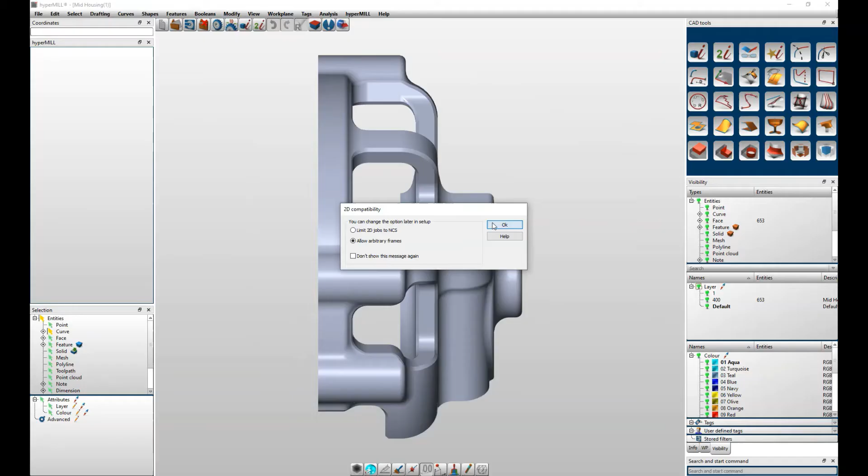So the first thing you want to do in Hypermill is, once you've imported your component, go to Hypermill Automation Center. Hypermill has software that can set it all up for you, including your clamp as well. You can see here all the different steps and options you have.

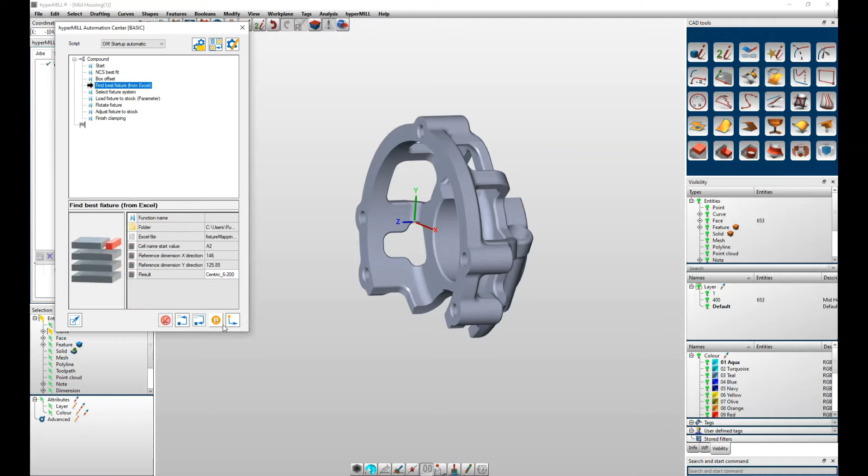If we have a look through it here, it's going to best fit the NCS for us at the start, box offset, select a fixture system, load it in, rotate it, adjust it to the stock, and then finish the clamping. You can see this here - that looks good.

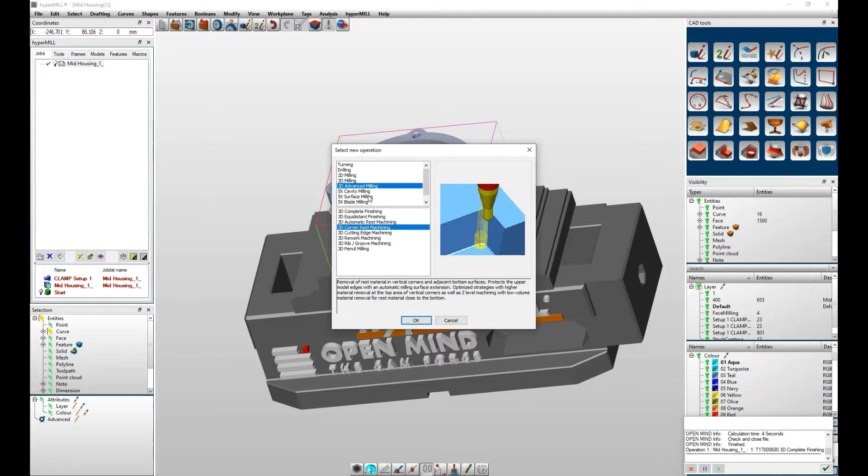Then what you want to do is create a new job list. So you want to create a new job, and the first job we're going for is 3D optimized roughing.

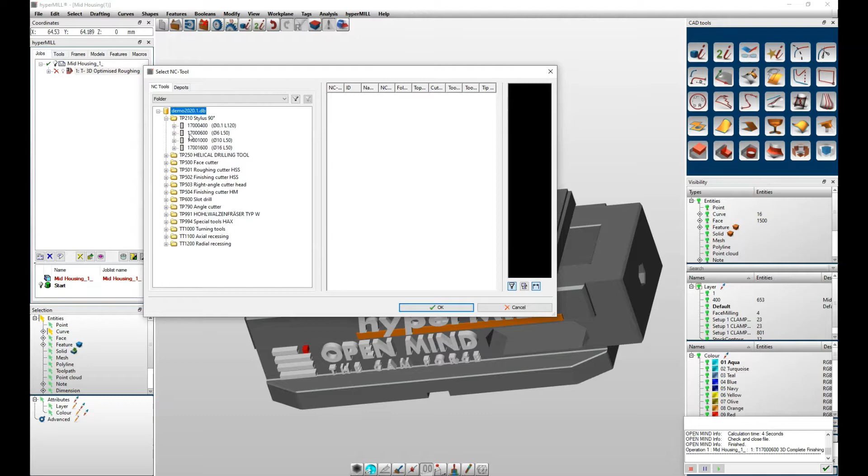You can see all the different options you have here. So then you want to select your tool. Hypermill has stock tools in its toolbox, so you have a lot of options there to choose from.

Next you want to select your strategy, so we're going to select roughing, fillet all toolpaths. You have other options here like using adaptive pockets.

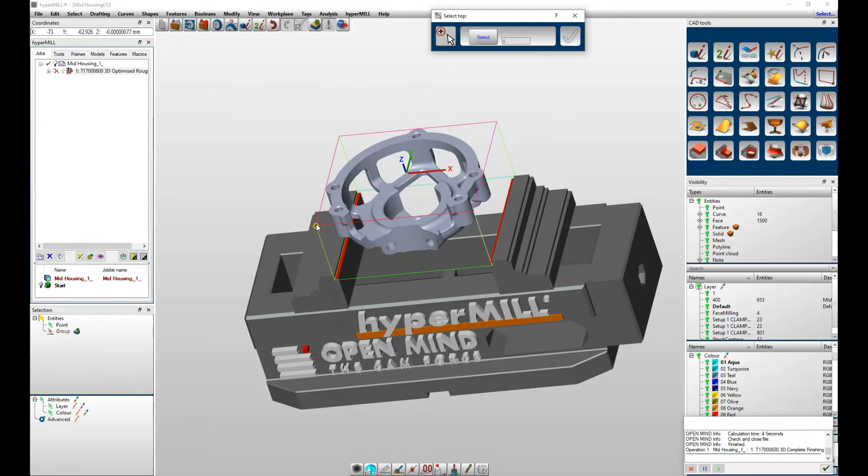Next you want to move on to your parameters, so you're selecting your heights, top and bottom. You want to specify your step overs as well, if you wish.

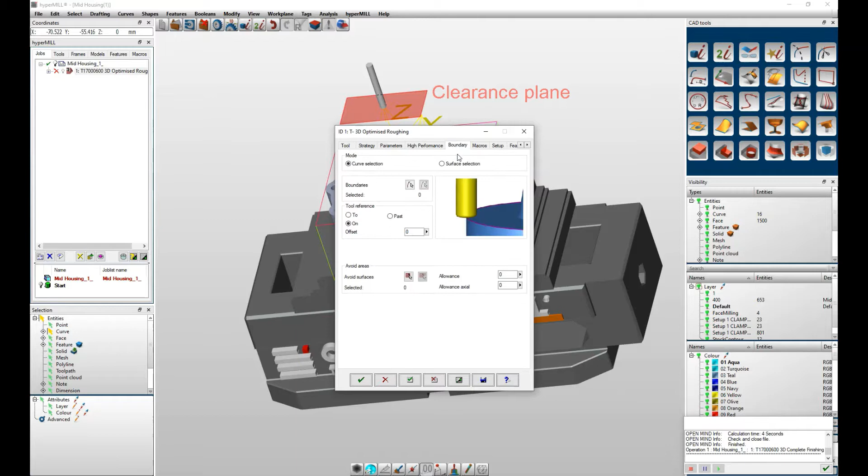Hypermill also has a high performance mode for the roughing, which you can use if you want. It does take longer to program but shorter to machine in the high performance area. So then you're just selecting through all the different options, making sure you're happy with all your settings. Once you're happy, you can hit calculate, and it'll start generating the toolpath and your resultant stock.

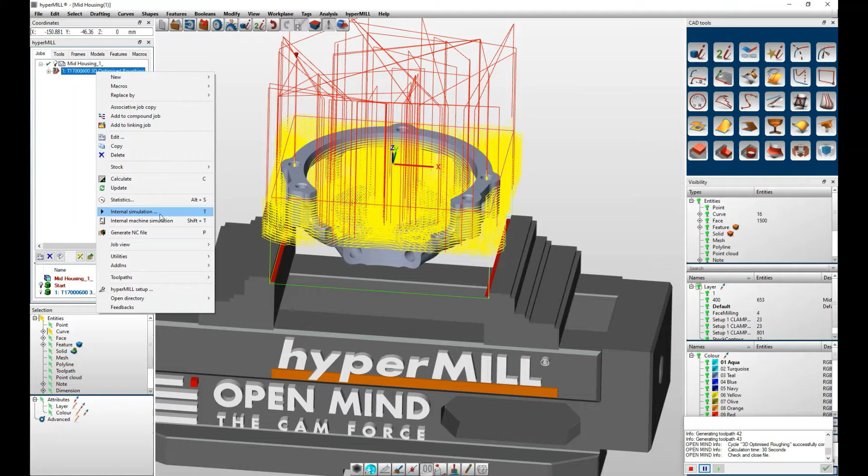Once the operation has been generated, you can right click and simulate the machine and operation internally. Hypermill opens a new window and gives you the option of changing the graphics and different things.

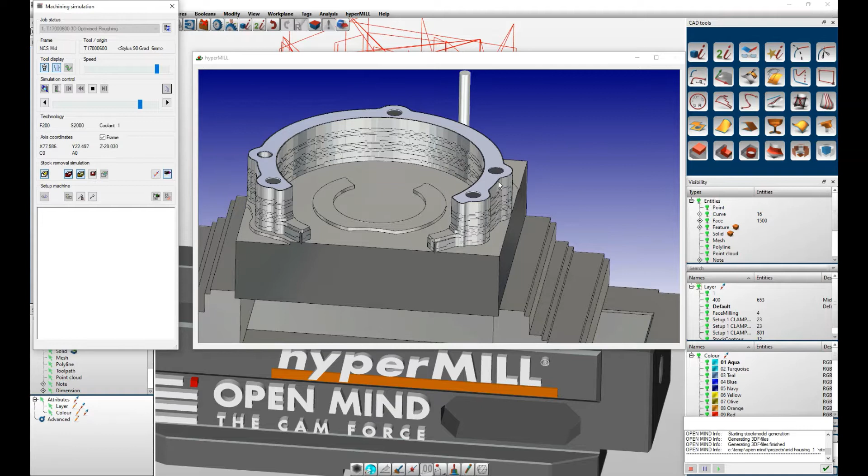That operation looks to be going well - it's machining what we're looking to be machined. So there, the machining operation has been fully simulated, and I'm happy with that result.

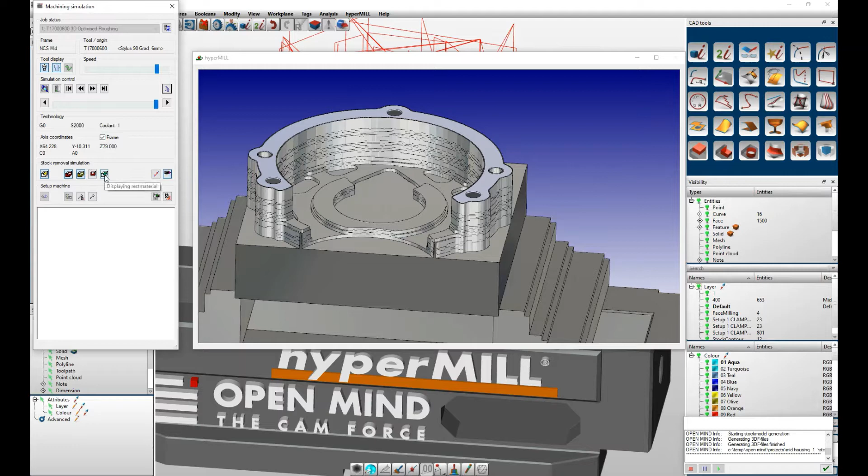You can see here different options Hypermill has for the simulation window. You can start the toolpath over. There's different graphic options here, stock removal, simulation. You can see on the left side of the menu different stocks.

If we turn this on, this is the resultant stock after the first machining operation, which is useful for seeing what you need to do next.

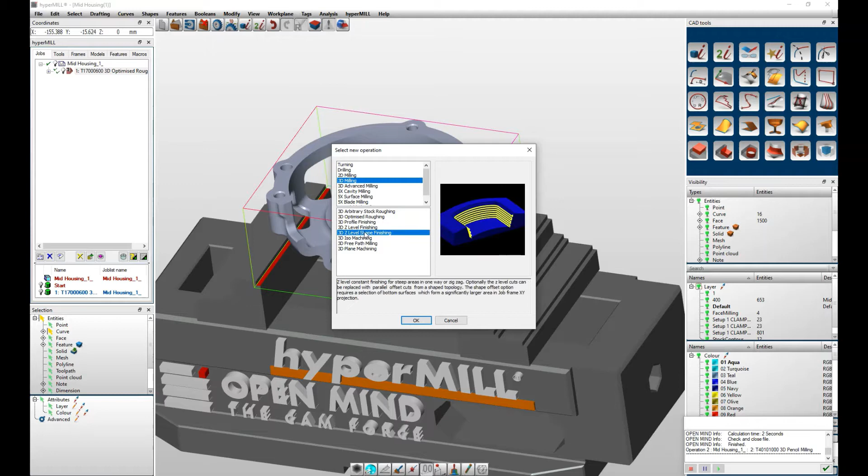So the next operation that we're going to program is a 3D complete finishing operation. We just select our tool here - we use a finishing cutter, and we're going to use an end mill.

So we're just selecting all of our settings here again. If we select zigzag and leave the radius at 2, then move on, select your heights again - that looks okay - and then specify your step downs again.

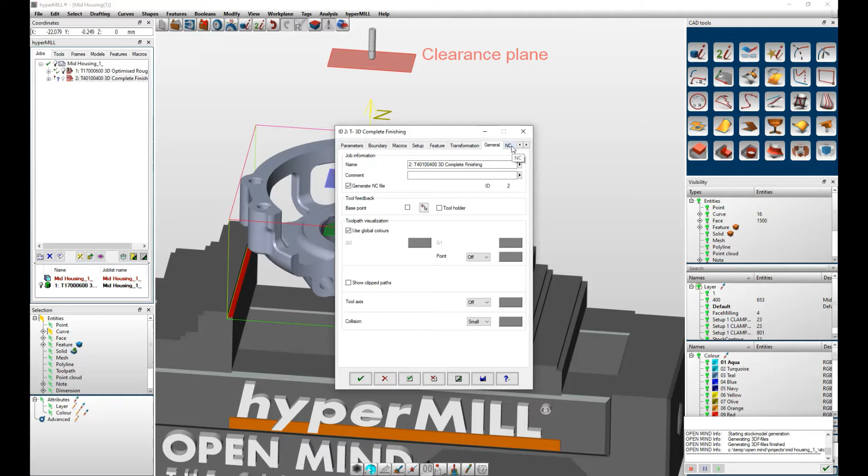This can drastically increase or decrease your machining times. So once you're happy with your settings, click OK and start generating your toolpath.

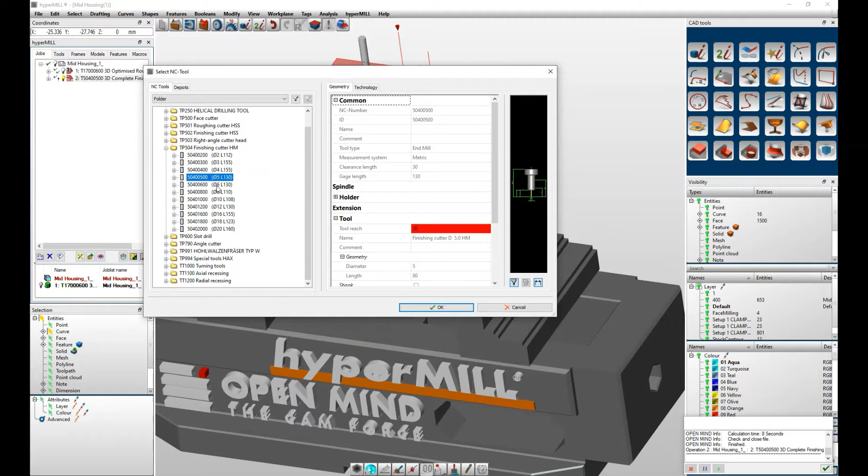So there you can see our toolpath has been generated. So if we go ahead, we could change the tool here actually to a slightly larger tool, which would decrease the machining time and increase the programming time.

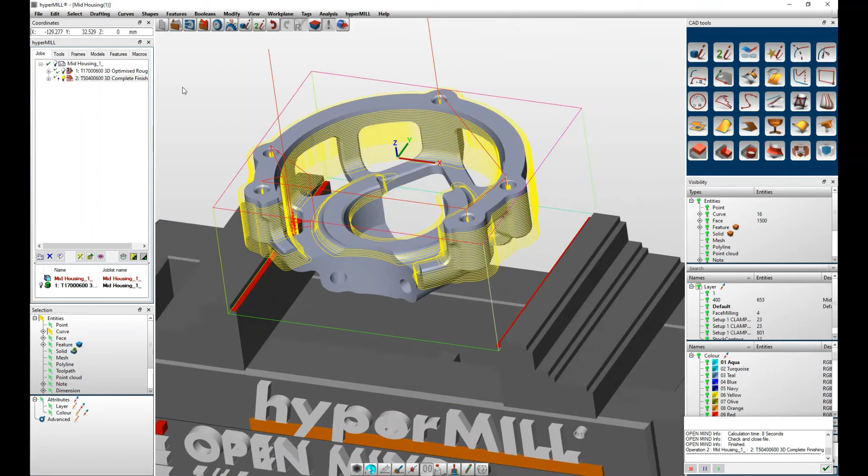So if we run this again, there you can see this time it takes slightly longer to generate the toolpath. So we can simulate the machining here in the machining window.

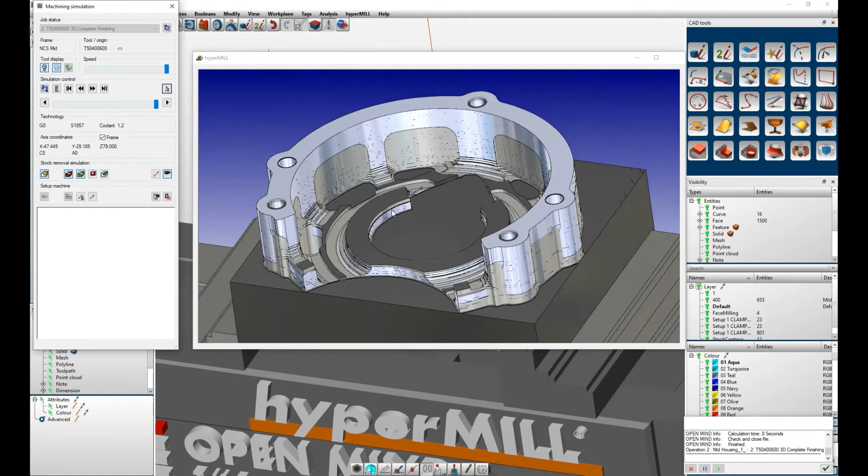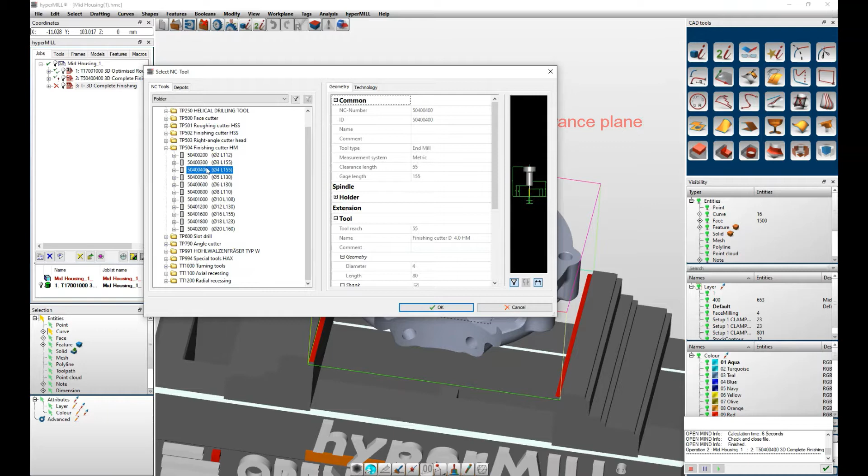And that looks good. That's exactly what we're looking for. So if we move on now, go to new job again, and we're going to use another 3D complete finishing operation. And this time we're going to use an end mill, and we'll use a slightly smaller diameter. So we'll go for a 4 mil, and then selecting all of our settings again.

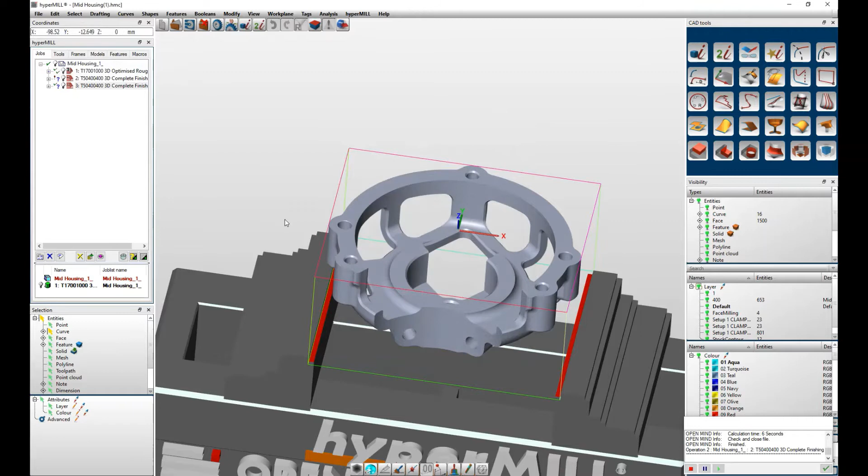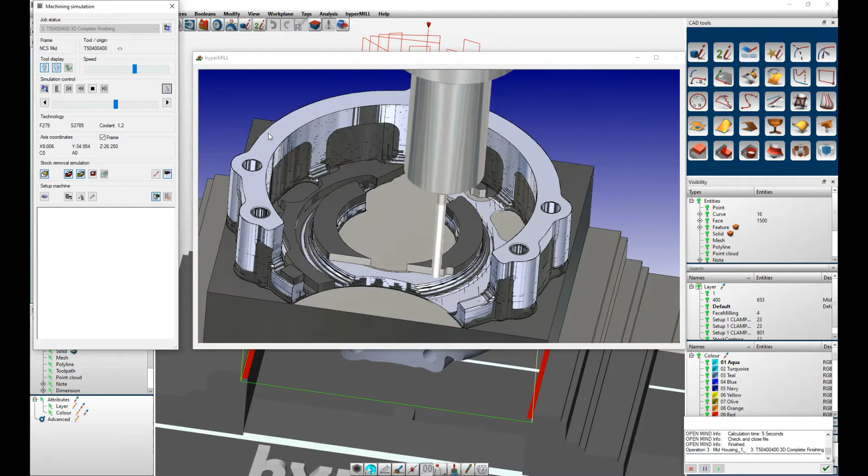We're going to machine flat areas. We're going for zigzag, and then again making sure the rest of your settings are okay. And there you can see the flat areas have been machined. So we can run the simulation here. And that looks good there. So it's machining all of the flat areas, leaving a clean surface finish. So we're happy with that.

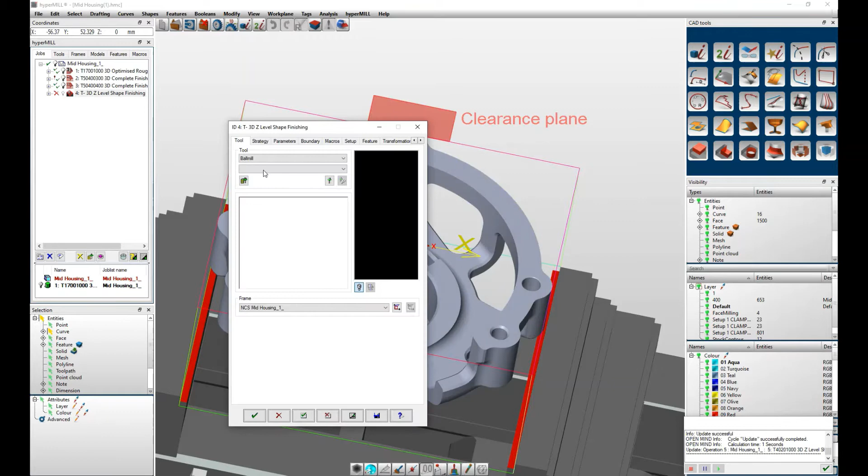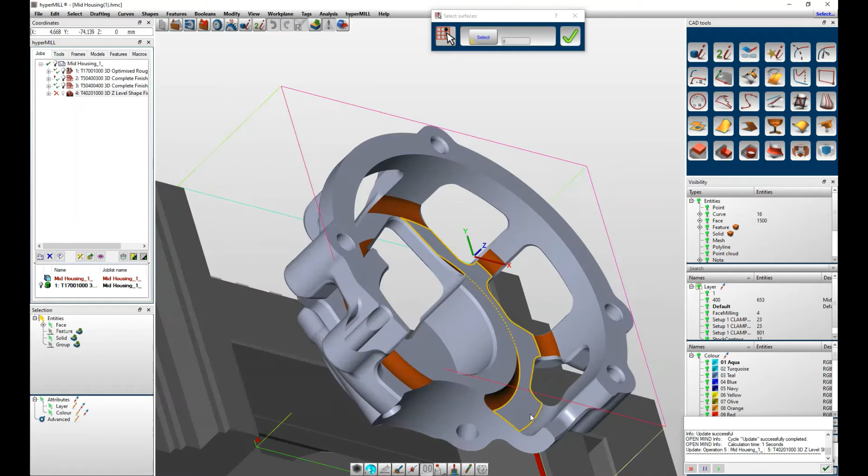Now if we move on again, another new job. This time we're going to use 3D Z level shape finishing, and you can use this for chamfers, fillets, interior walls, whatever you think it's suitable for. So selecting your heights again. If you're machining fillets with this operation, you would prefer to use a smaller step down, it gives a better surface finish. So then we're just selecting our faces here now, using the milling surfaces feature. So again, making sure everything else is okay, and then generating your toolpath.

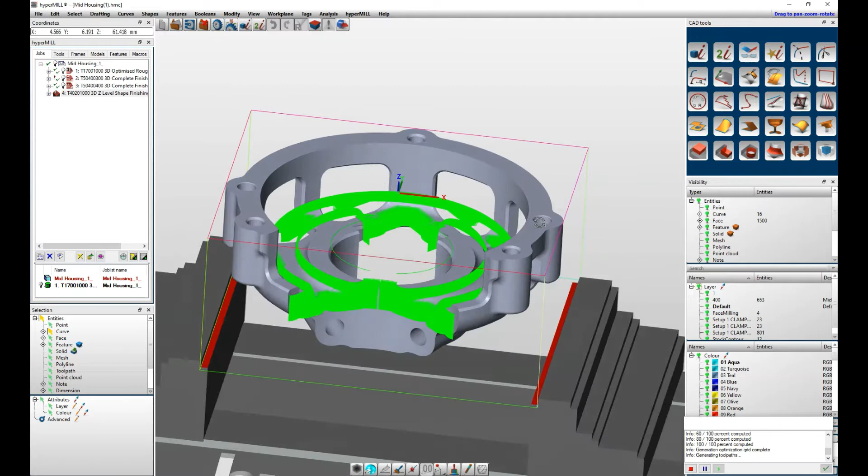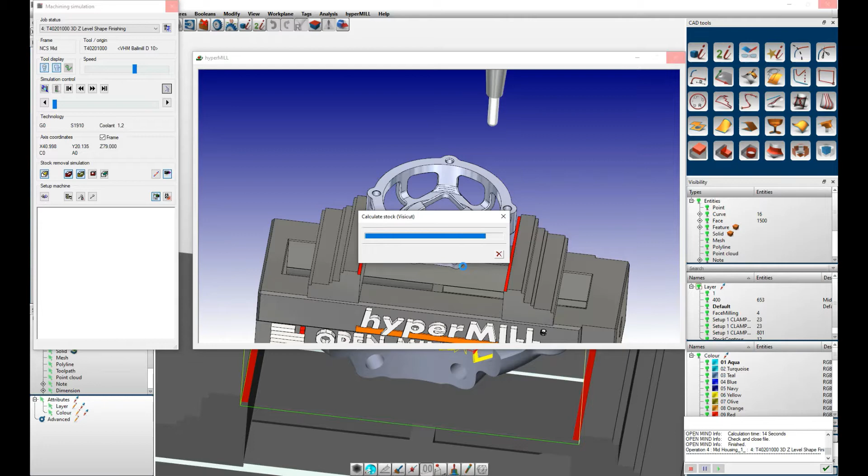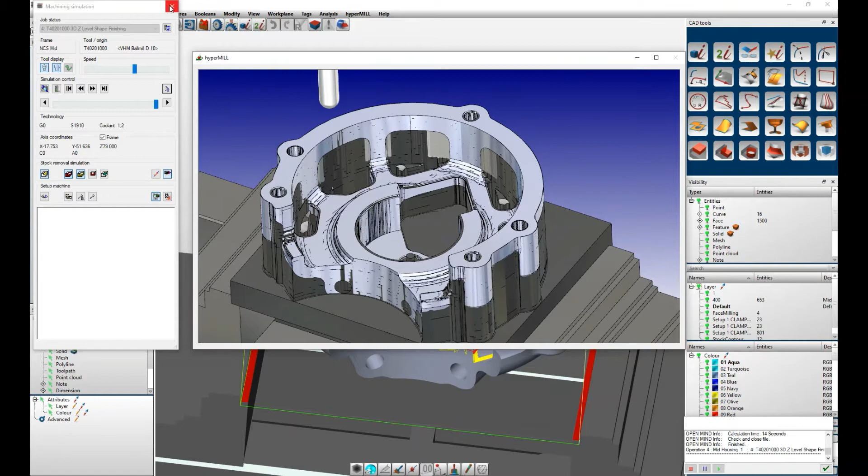So once your toolpath has been generated, you can simulate your machining through. And you're looking out for collisions here as well when you're simulating your machining. hyperMILL will give you a notification if there are collisions. That has machined the fillets on the inside of the mid housing very well, so successful machining operation.

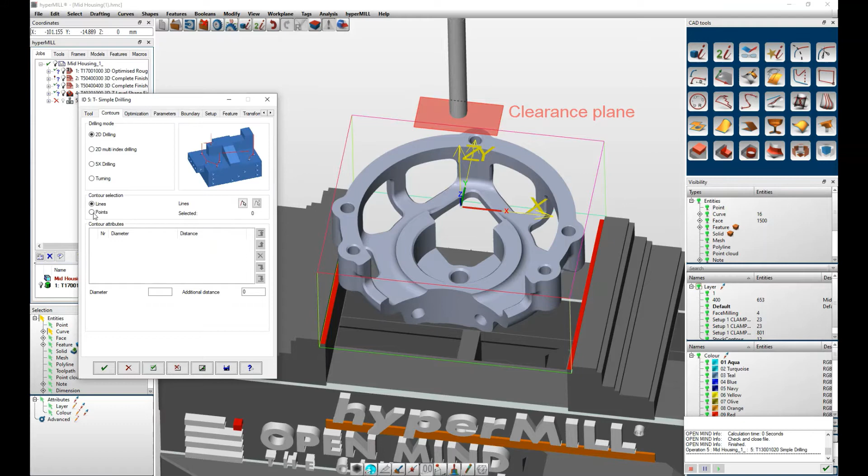So the next operation that we're going to program is a simple drilling operation, and we're just going to drill straight through the middle. So selecting the appropriate size drill bit, then selecting the center point and the midpoint, and then your heights, making sure that you're drilling the whole way through. So you need to add a little extra bit on the bottom.

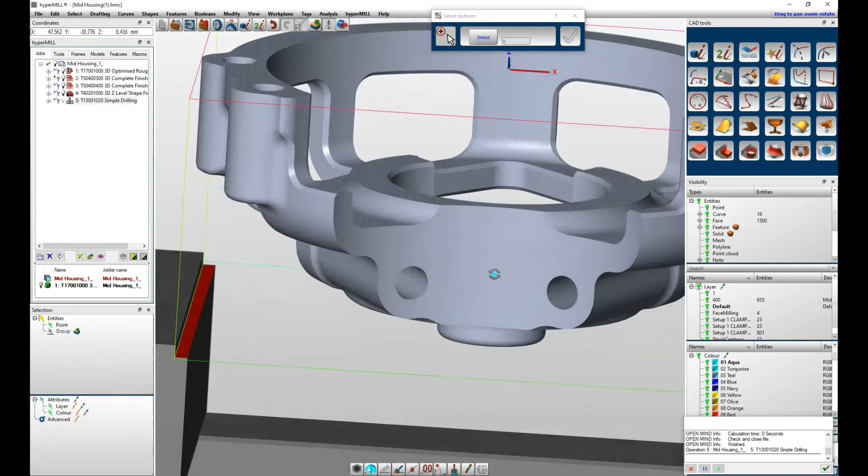So you can do it manually, or you can select it and then leave your value or change it if you wish. So then again, making sure all the rest of your settings are okay and generating your toolpath. So we'll simulate this and see what results we get. And there, that looks good. So nice clean drill straight through the middle.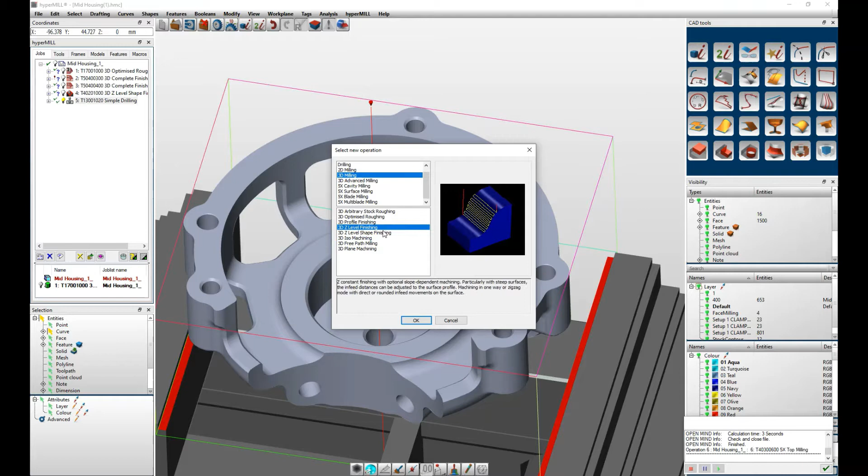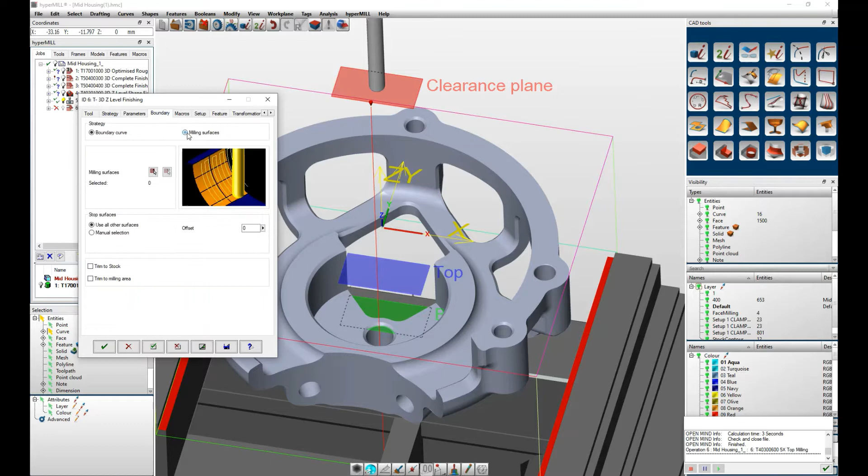So if we move on to the next machining operation, we'll select 3D Z level finishing. And for this we're going to use a bull nose end mill. We're going to use 6mm diameter, 1mm corner radius. Then we're just selecting our settings here again. Fillet interior corners, just going to specify the radius of the fillets. Again, selecting your heights. And your step down, very important again. And we're going to use the milling surfaces feature. So if we select here and then we select our faces,

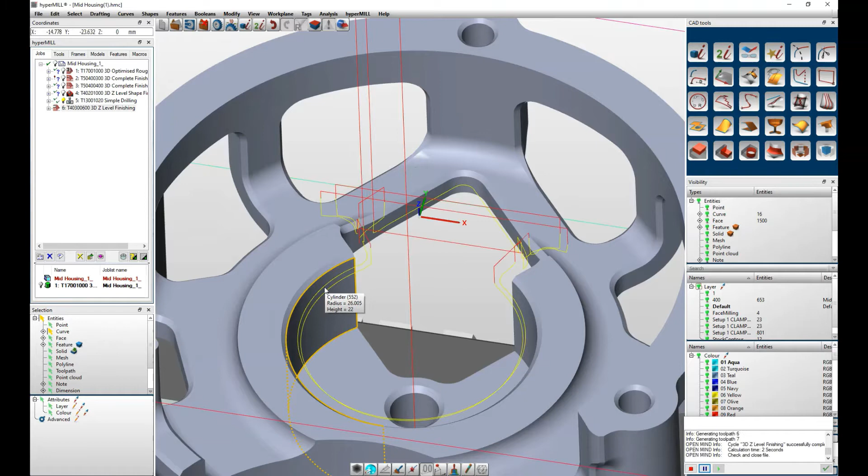and once you're happy with all the rest of your settings, go ahead and generate your toolpath. So we can simulate the operation here. So it's a fairly short machining operation. It's just machining the fillets. Sorry, the chamfers along the edge. So that looks okay.

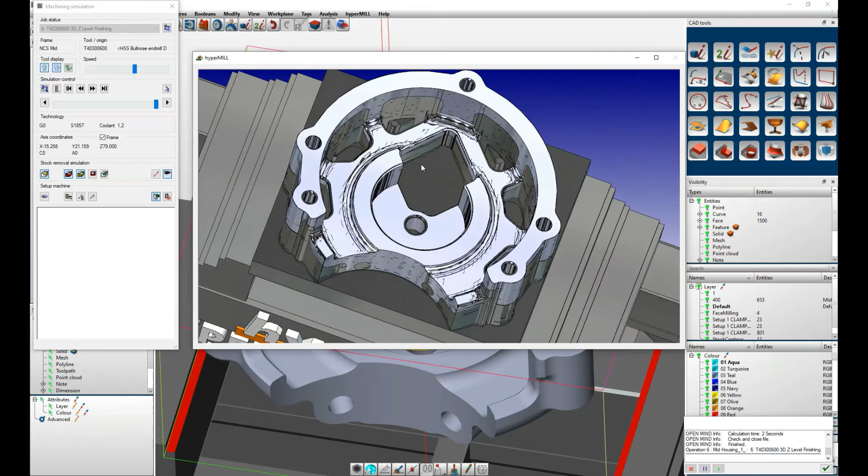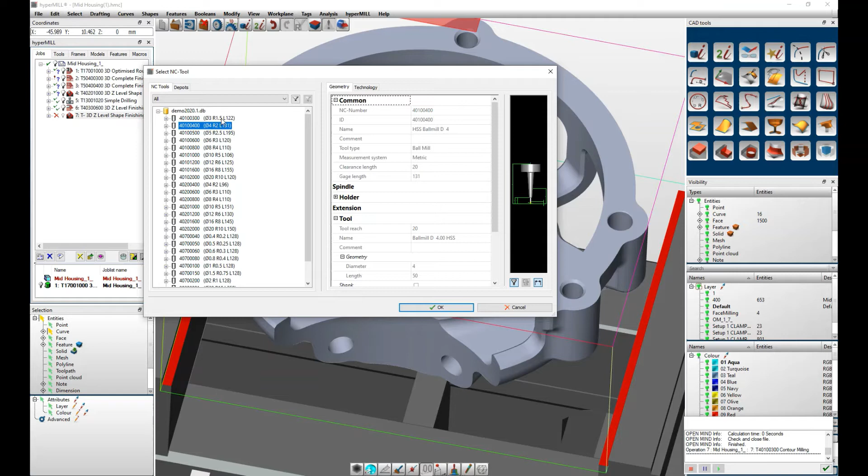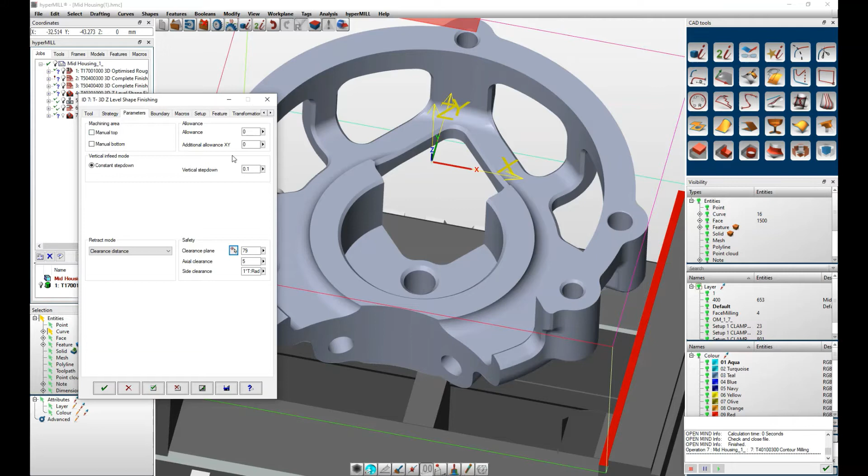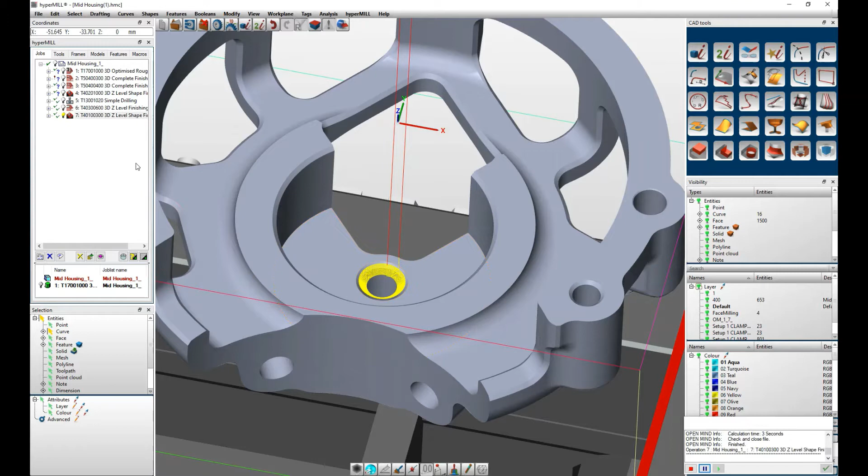So if we move on then, the next job we're going to program is 3D Z level stock finishing, or Z level shape finishing, sorry. We're going to use a ball end mill for this operation, and we're going to use a 3mm diameter tool. Again, just selecting your settings, specifying step overs and heights. So we're going to use the milling surfaces feature again, just to select this chamfer. So once you're happy, then go ahead and generate your toolpath. And you can see that looks good so far if we simulate it through.

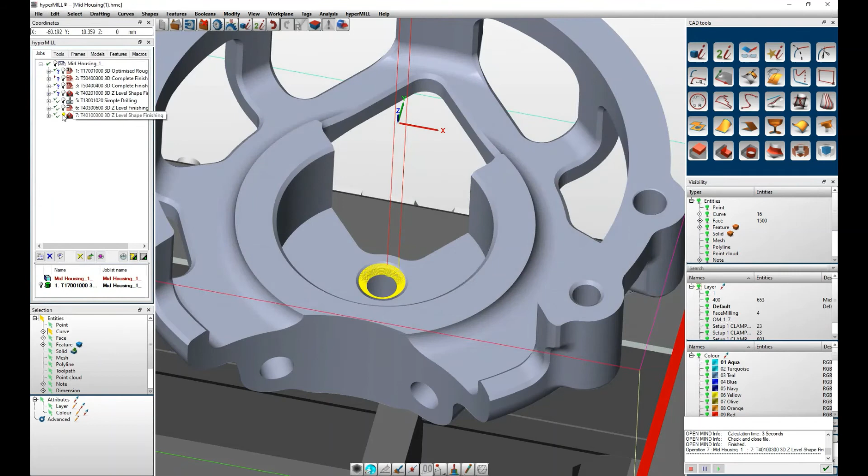Okay, so that operation is machining the correct area and it's leaving a good surface finish. So the next thing we want to do is these chamfers along the top of the drill, or these holes. We can actually edit the last machining operation and just add in the selected faces. So we can click here and this side as well, because it just adds these faces to the chamfer that was already machined. So if we rerun this operation, you can see the toolpath generated now, and that looks good. It's machined all of those chamfers.

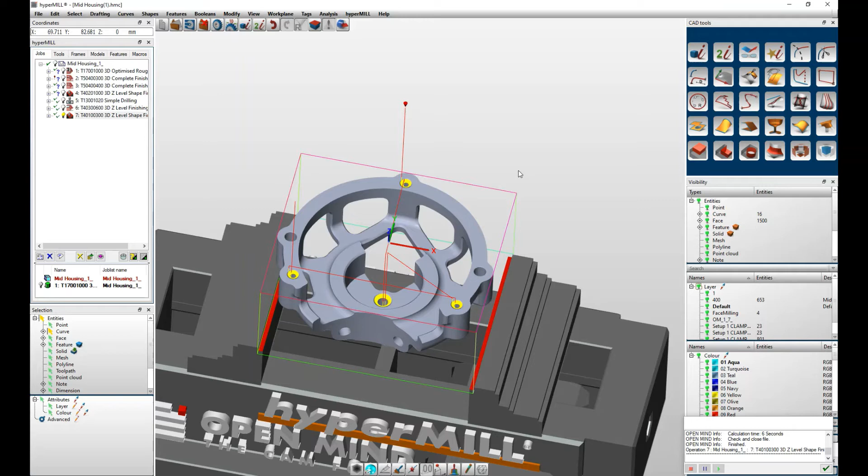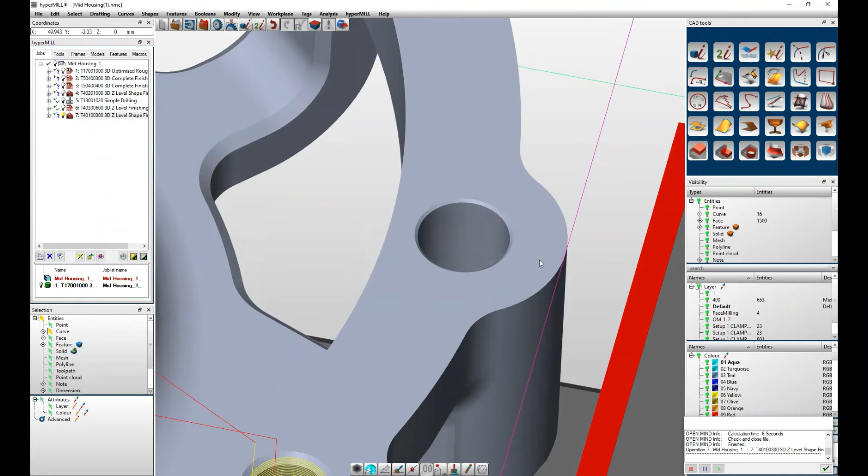So if we edit this again and we go to boundary and select faces, we can actually select these smaller chamfers also and add those in. So we can put all of these smaller chamfers on the one machining operation. So there are the toolpaths generated. And if we simulate this through now,

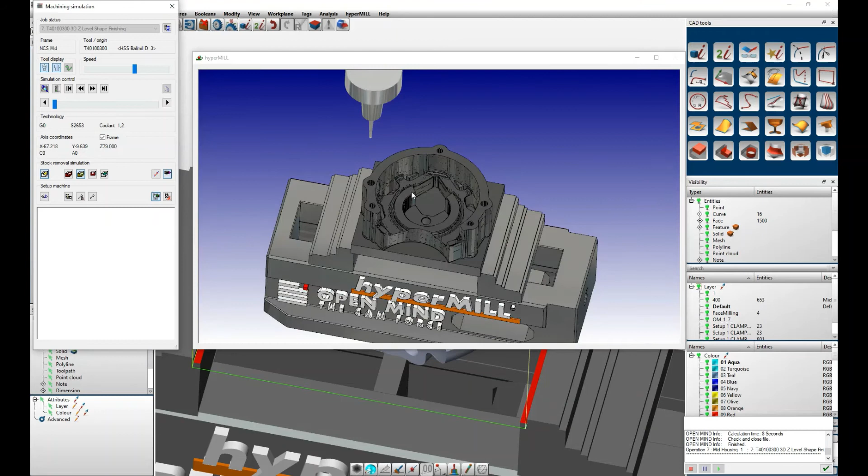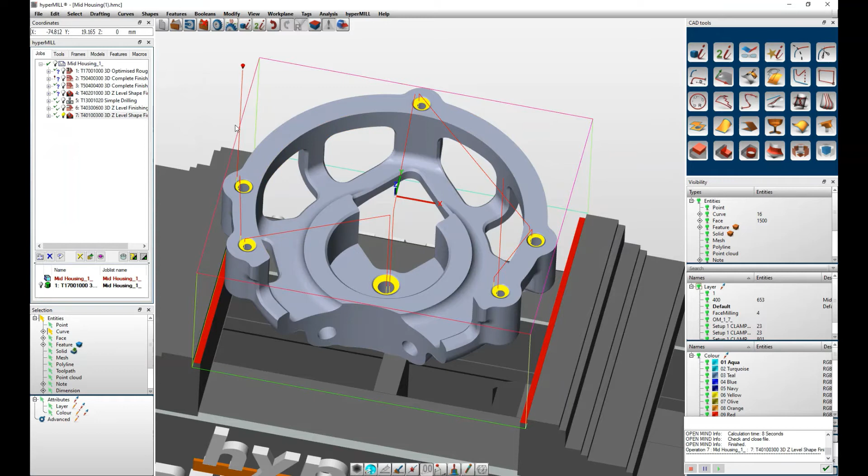okay, so there's the updated stock, and if we go ahead and play this simulation, you can see the machine giving a good surface finish on these chamfers, mainly due to the step over. Okay, so happy with that operation.

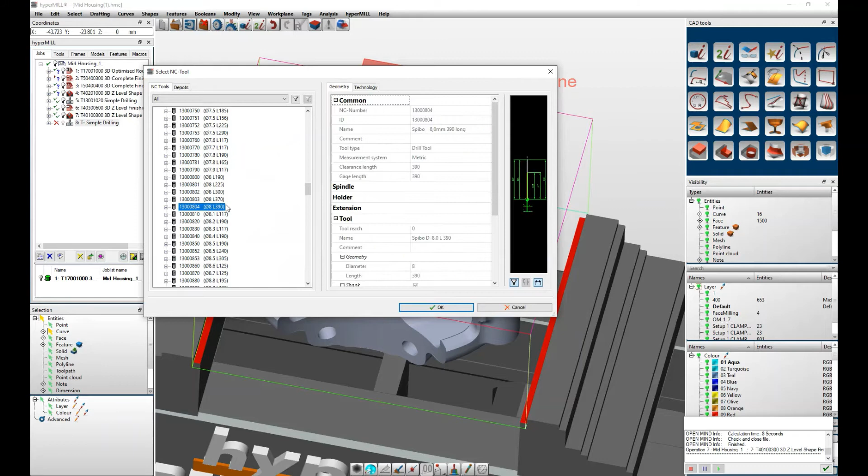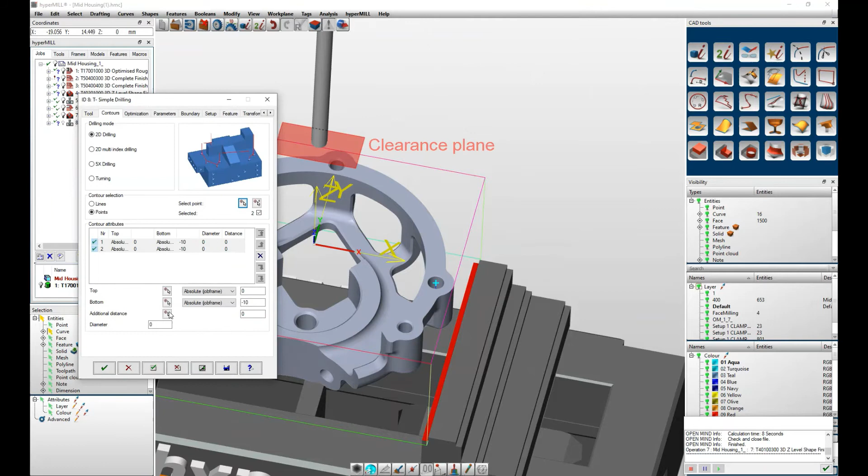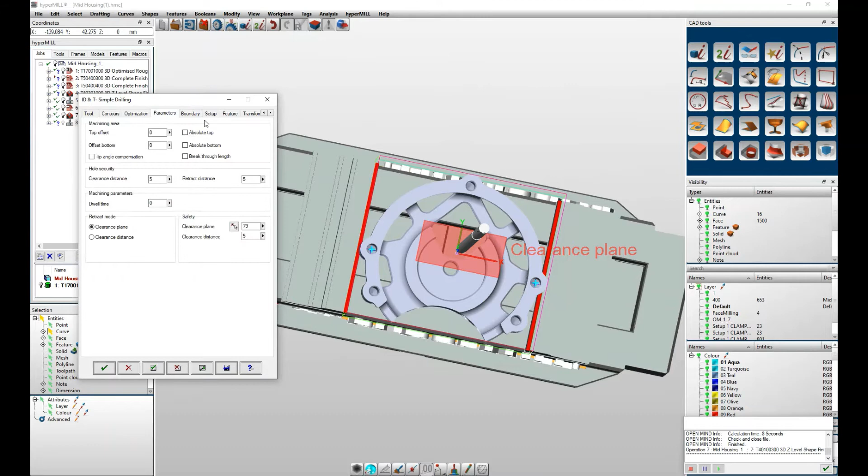Now, next what we want to do is drill these holes on the top of the mid housing. So if we go new job, and we're going to go simple drilling, and then we're just selecting the appropriate size drill bit. Again, making sure the rest of your settings are correct. So you can select the midpoint of your holes. So we'll do these two first because they're the same size. And then selecting your heights again. So once you're happy, go ahead and click calculate.

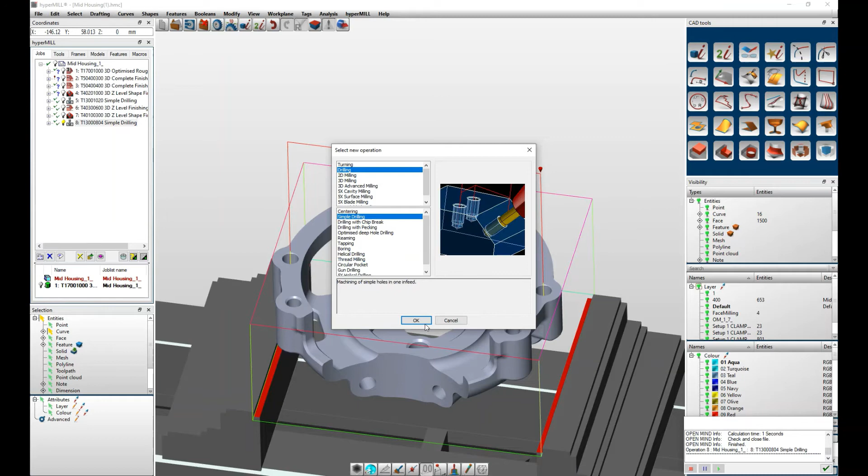Then we'll do the second operation for the other three holes. So new job again, simple drilling. And again, selecting the appropriate size drill bit for the three holes. And then making sure the rest of the settings are correct. So selecting the center of your three holes.

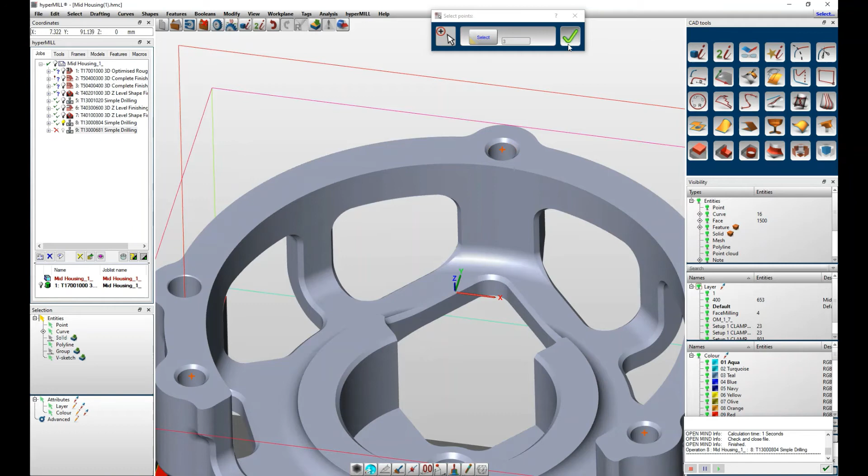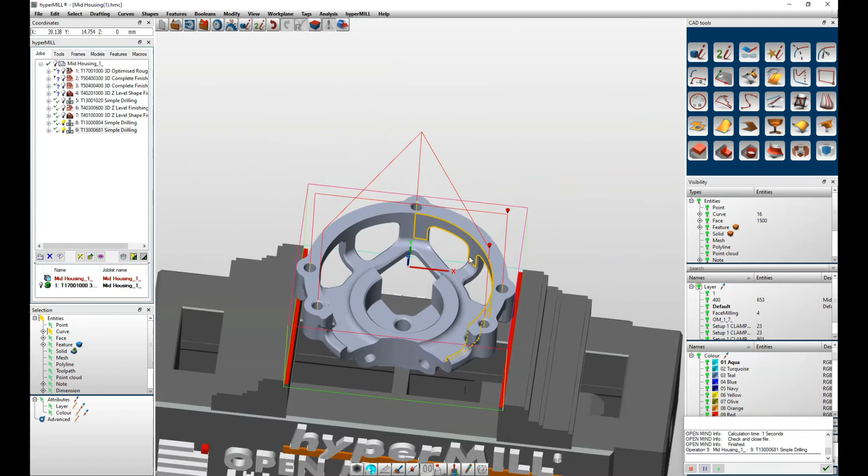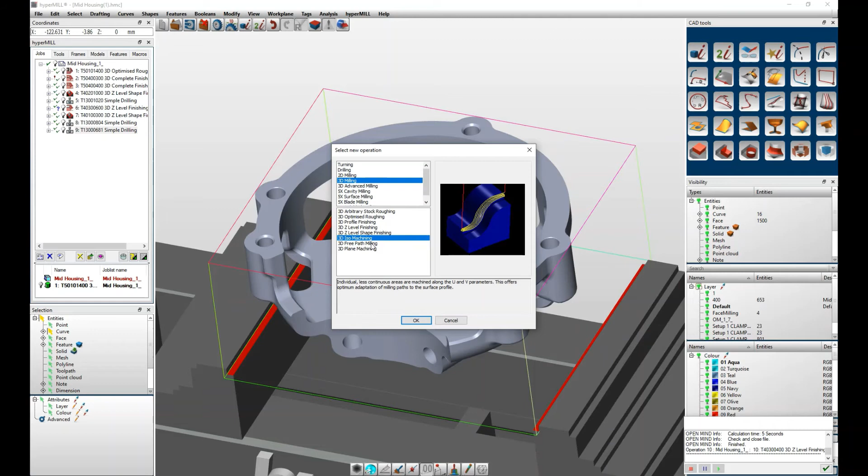So once you're happy with the rest of your settings, go ahead and generate your toolpath. You can see here that the toolpath's generated and it is drilling the three holes we selected. So if we go for a new job now and continue with the next operation, we're going to use ISO machining for this operation. We're going to be machining the chamfers on the inside of the inside pockets.

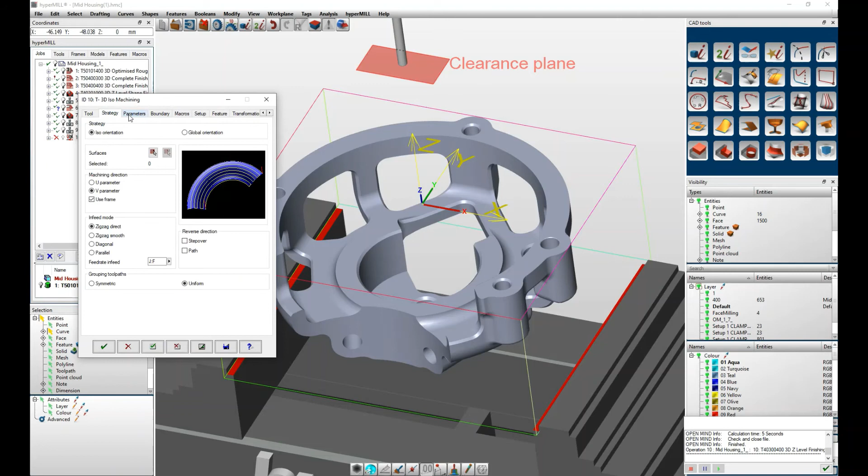So we'll use a bull nose end mill for this operation. Again, just selecting our tool here. And we're going to use the V parameter for machining direction. We're going to use zigzag direct. Again, selecting the rest of your settings, making sure everything's correct for the operation. And we're also going to use the select surfaces feature to select the faces that we want machined on the chamfers and the inside of the pockets. So if we just click these, very simple.

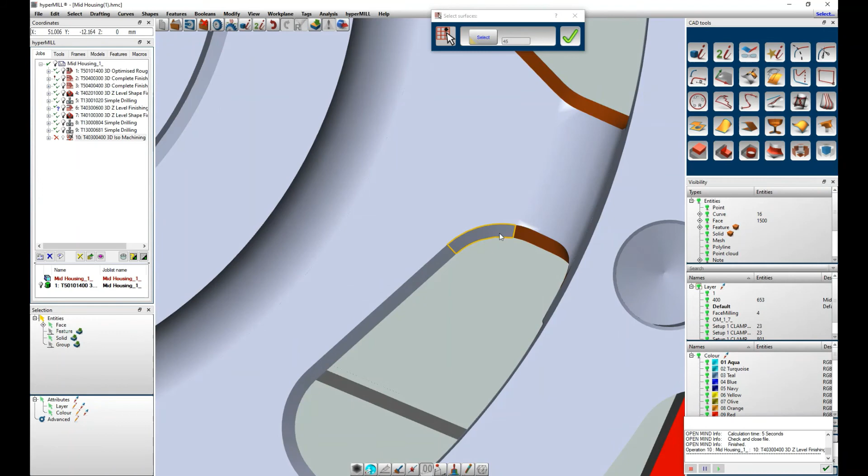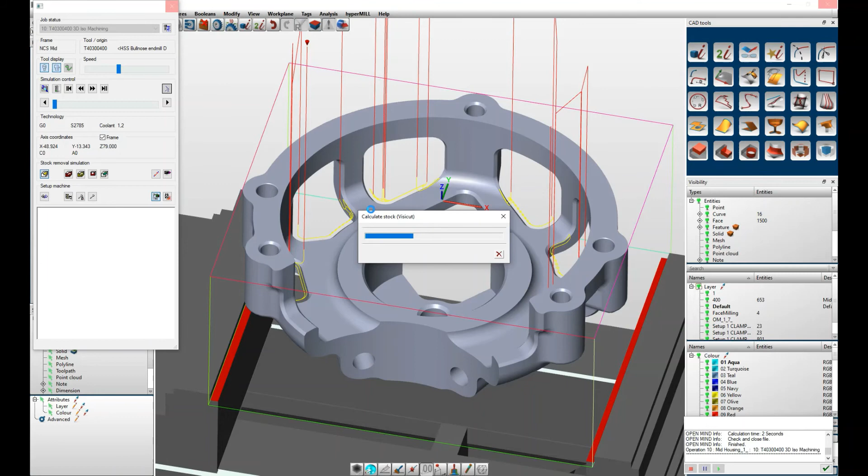So now that we've selected all of our faces, we can go ahead and calculate the toolpath. You can see here it's been generated. So if we simulate the machining, it looks good. We're machining the right areas, and the step over is ensuring a quality surface finish. So happy with that.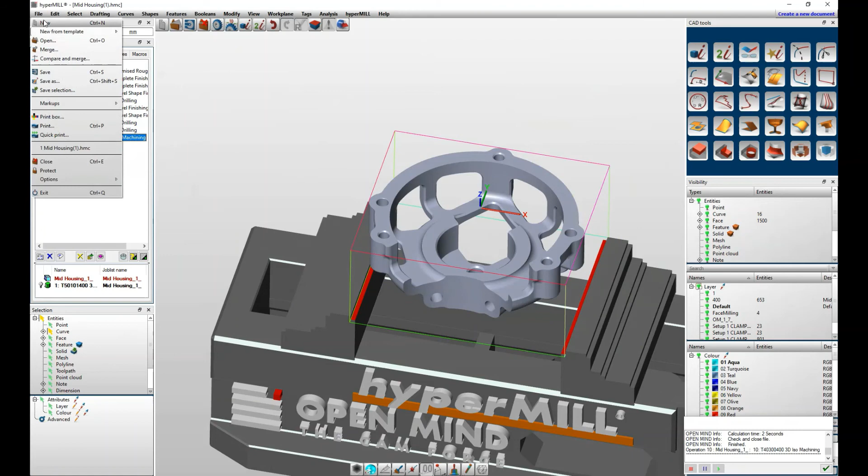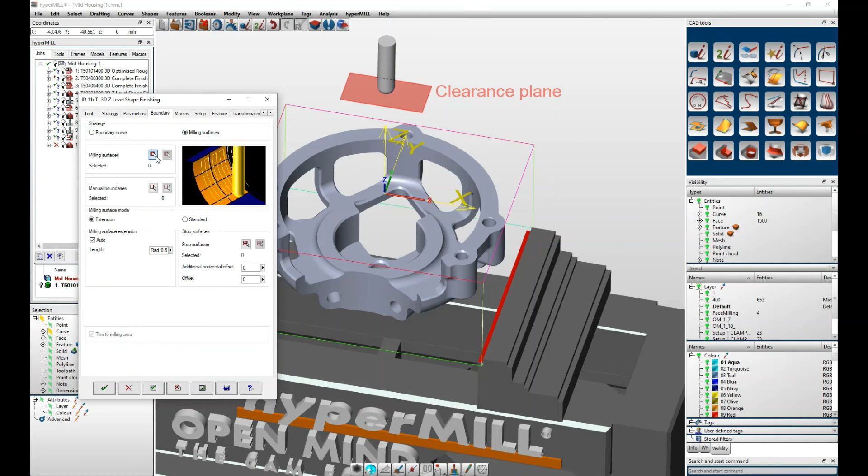And always make sure to save your work as you go, because CAD/CAM programs are more susceptible than normal programs to crashing. So if we move on then to the next operation, we're going to use another Z level shape finishing operation. So selecting the appropriate ball end tool, and then again selecting all of our settings. We're going to use this select faces again. Very handy tool, very easy to use, and we're just going to select these fillets that we want machined here, and we don't need to specify too much in the settings here, so we can go ahead and generate the toolpath.

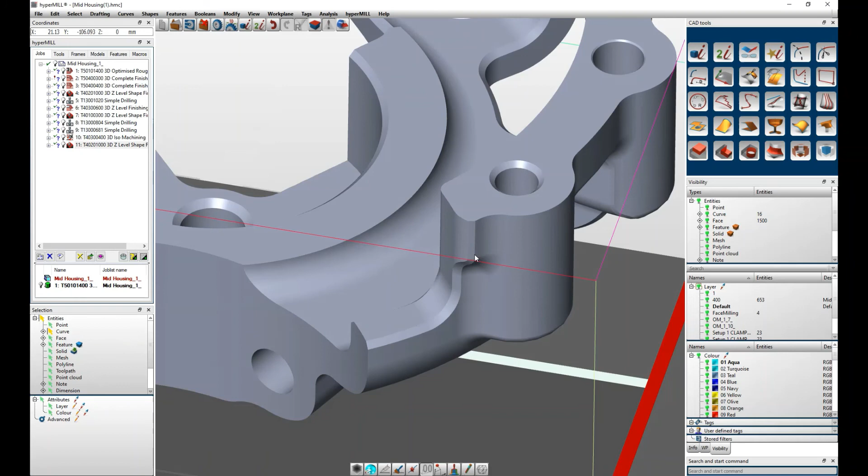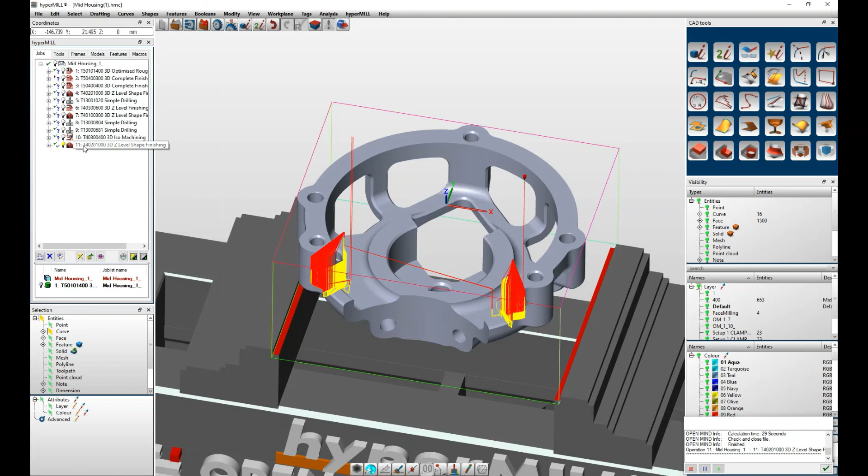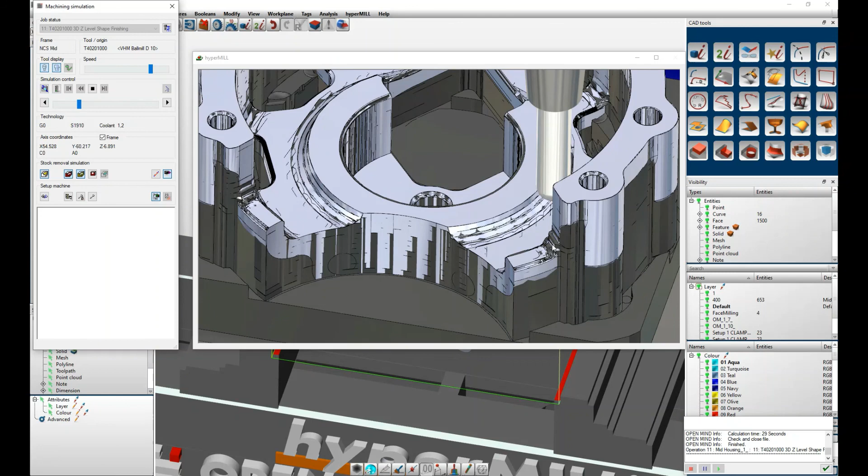So now that toolpath is being generated, you can see it's machining the right areas anyway. So if we go ahead and simulate this through, we can have a look at how it performs. Yeah, so there's no collisions there, machining the right areas. So that's it for this tutorial. This was the first part of a two-part 5-axis machining tutorial for Hypermill.